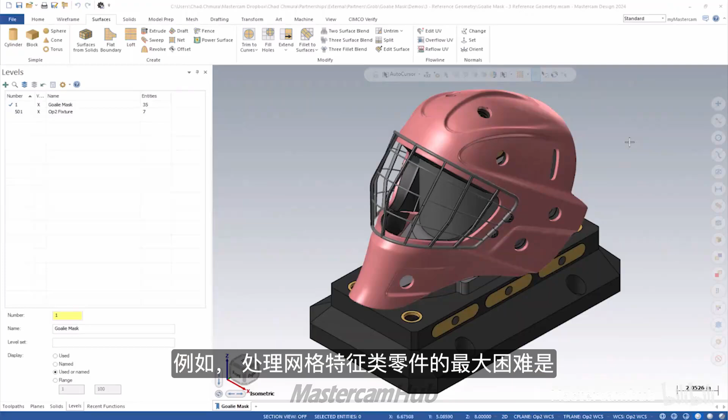The biggest difficulty with mesh parts is that they're essentially just one body. So when you pick this as your drive surface, the whole thing is your drive surface, so you may need to trim it and cut it up a little bit. I had to make a few different bodies out of this, but sometimes you really just don't want to program a mesh, and there's actually a few cool ways of turning this thing into a surface.

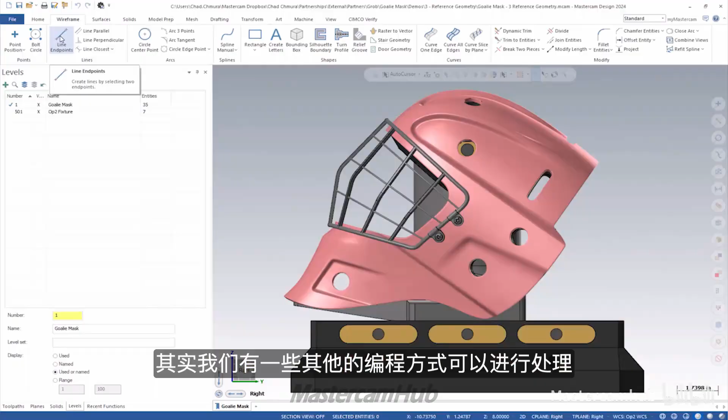What I did in this case was just draw a quick line, something like that, and offset it a few times to get a rough layout of some lines. Then if I go transform project, I can take these simple lines and project them onto a surface, saying that's my surface, and now I have lines that follow the exact contour of that mesh.

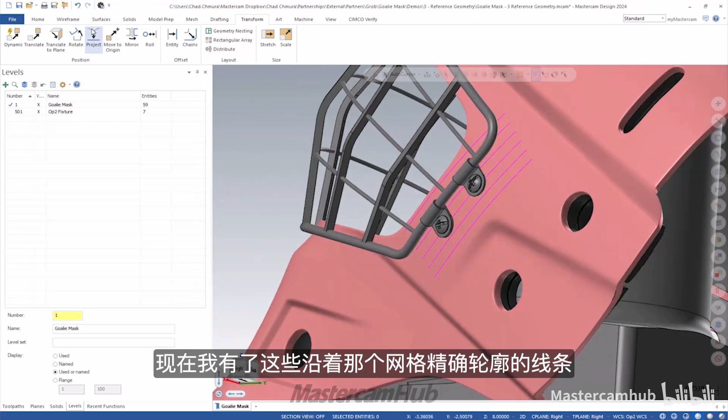So if I take and loft a surface across those lines, I can flip the normal - you can see it's green there. Now I have a surface patch that is basically the exact same thing as this mesh. So it looks like you picked that one specifically, is there a reason why you did that?

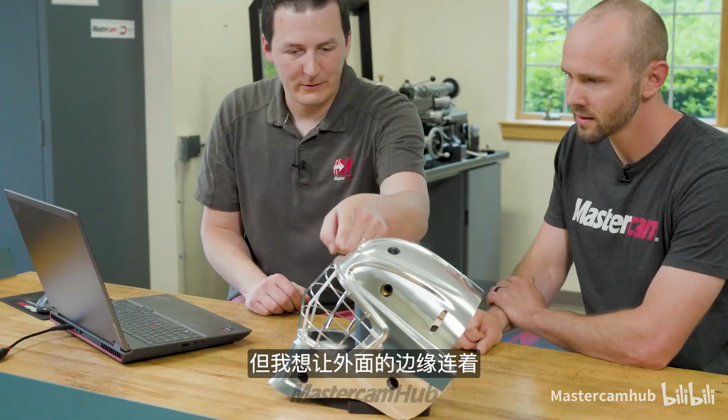There's actually a gap here between the tube on the outside and the shell of the helmet. Yeah, I see it right here. Right, so on the actual part I had to fill it in, because despite how cool and thin the mask ended up being, I wanted to keep the outside rim attached. I had to create a surface that wrapped all the way around this tube to not allow the tool to fall inside. What I did was basically create a fillet surface.

Now, all I have to do is create a line that is going to represent the vertical of the fillet. The whole goal here is we really don't want to see that fillet - we want to know it's there in terms of structure, but we want to make sure that fillet is fully hidden from the viewer. So you're talking about this fillet right here? Yep, see how you can't really see it until you position your head just right. The goal is to make sure it's really hidden.

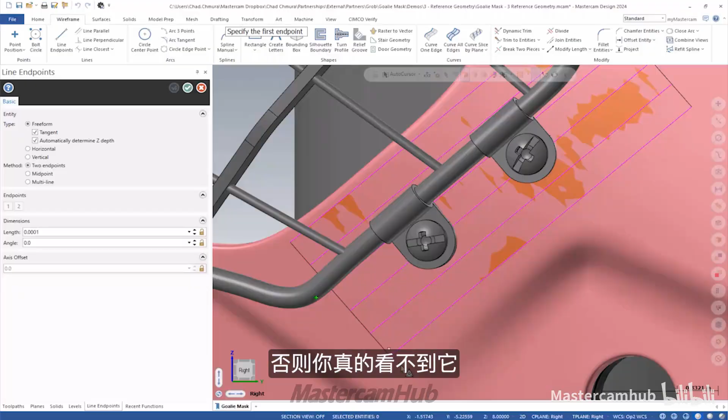So in order to create that fillet, I have to create a piece of wireframe here that is just inside of the outer edge of the shield. Now, an issue I ran into is, see how it's hitting all these autocursor points? Yeah, that must be annoying. I can't really get the line I want, so you could always go and turn off your autocursor, but check this out.

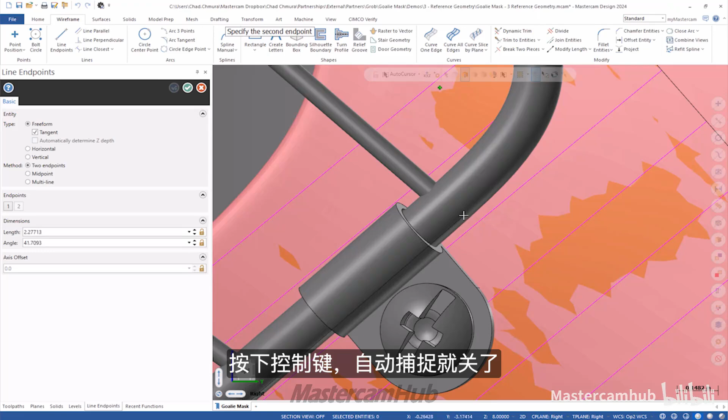Press down the control key and your autocursor turns off. Now that is a nice feature I did not know about. So even if you wanted to create a line that's like 1 degree - look at this, I have a 2 degree line, but I can't really get that. If I hold control down, I can get any line that's really close to horizontal that I want.

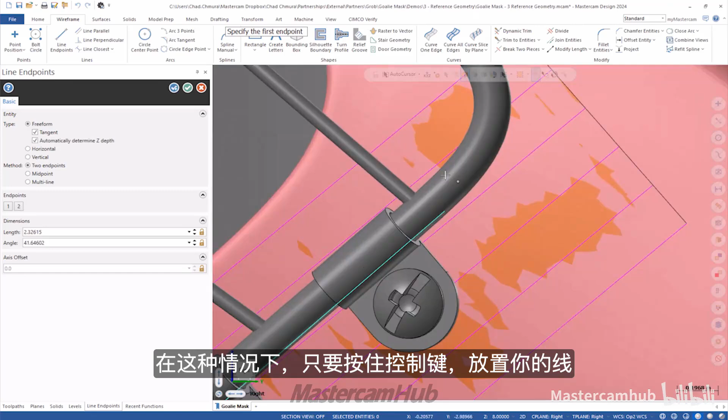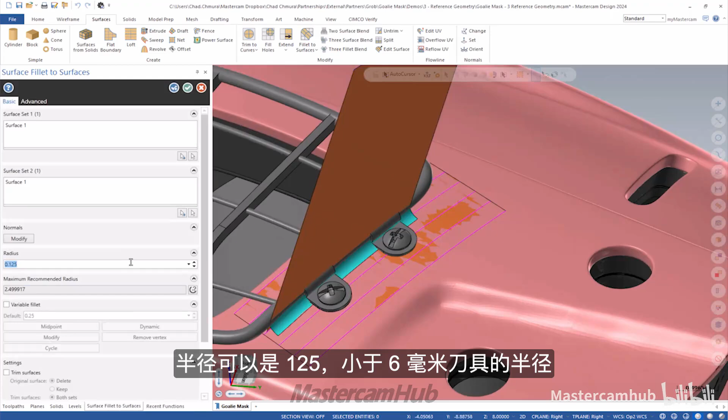So in this case, just hold control down, place your line, and I'm going to create a drafted surface here. This surface doesn't really matter, it's just going to be kind of the seed for the fillet. I'm going to go and create a fillet between this and this. The radius can be 0.125, it's just going to be less than the radius of my 6mm tool.

Delete these guys, and now I have this really nice fillet that's hidden from the viewer, and it's going to maintain structure on this part. Yeah, because the issue you always run into is that it doesn't blend nicely with the corresponding surfaces. Right, so having that fillet really tangent to both of those surfaces, it's not going to jump out to your eye, because with a part like this, everything's finished so well you need those blends to be absolutely perfect. And in this case, Mastercam surfacing, perfect.